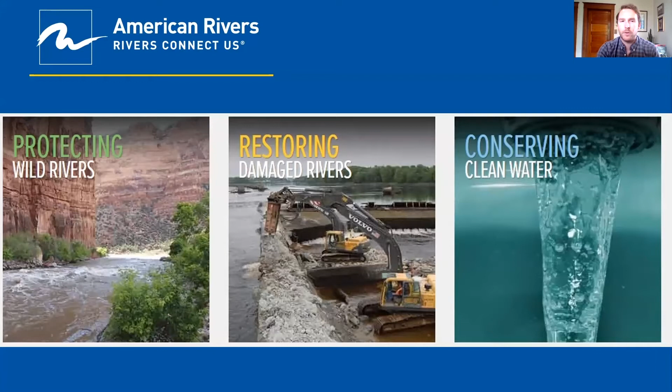At American Rivers, we are concerned with protecting wild rivers, restoring damaged rivers, and conserving clean waters for communities across the country. So when we're looking at a river, we're not just looking at the single thread channel itself—it's much broader than that. We like to take more of a watershed view of river health, and associated with that are the floodplains. These are the broad, flat areas along a river that become inundated during periods of flood, and they provide vital aquatic and community benefits.

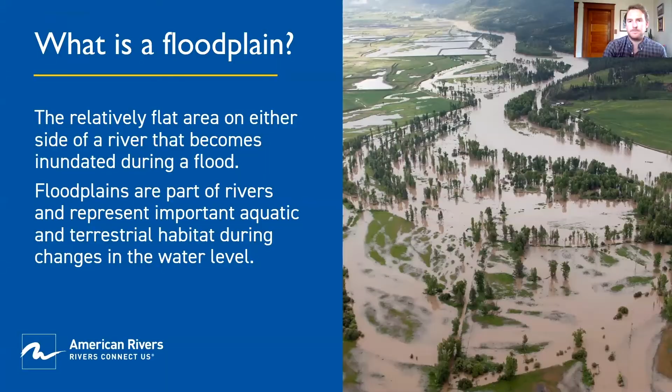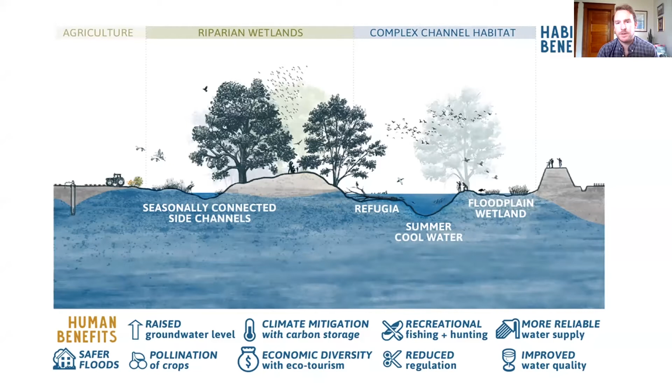A few of those benefits are things like storing floodwaters, which can help protect property adjacent to those floodplains—it stores that water and then re-releases it. That can also help clean the water because it filters through the vegetation and soil. When it floods, it also deposits rich sediments onto the ground that can aid agriculture or other industries, as well as support aquatic and terrestrial life. Floodplains also store groundwater and provide recreational opportunities, specifically when they're not flooded, more of which we'll discuss later on.

The history of floodplains and floodplain development in our country is somewhat consistent. When European settlers came in, the majority of our rivers and floodplains were more natural. As settlement occurred, a lot of the forests around the floodplains and rivers were cleared, and those raw materials were transported downstream and made way for agriculture. As part of that, both our land and our rivers began to be augmented.

To support those new resources coming out, industry came in afterwards and usually settled along rivers or ocean fronts and estuaries, processing those materials and transporting them elsewhere. With industry came jobs, and development began to expand throughout the floodplain. So to support and protect those emerging industries and communities growing up in the floodplain, new flood protection measures came online throughout the 20th century, and now we're left with the situation we have today.

A lot of our rivers have been straightened and leveed to protect the businesses and residences behind them, because our floodplains now provide substantial tax base to these communities. In King County alone, 65,000 jobs are located in the floodplain, supporting about 7% of our overall economy. So these areas are really important, and they were protected over time, and now consist of a variety of uses, including industrial, commercial, and residential developments.

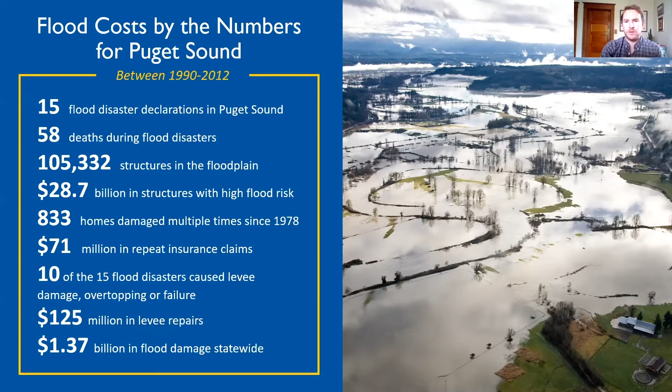Despite having 400 miles of levees throughout our region, flooding remains one of our largest and most costly natural disasters. We've had 15 major disasters since 1990, with over 100,000 structures still in the floodplain, resulting in over $1 billion in damage over the last 30 years. While this is a consistent problem for us, it's not unique to us—these numbers are dwarfed by those in the Mississippi, the Midwest, and the East Coast. This is an issue throughout the country and part of why we're all here today.

In the Northwest, we have endangered species, which adds another layer of complexity. Our Chinook salmon, king salmon, populations have declined by 93%, largely due to habitat loss. The majority of our riparian forests were cleared at the beginning of the 20th century, and only about half of our floodplains remain—and of that half, most are in poor condition. It's no wonder these iconic species are declining.

As a result, so are the predators that rely on them. Southern resident orca whales are also listed as endangered, and Chinook salmon are their primary food source.

So when we're talking about floodplain restoration, what are we actually talking about? In this context, floodplain restoration refers to returning the connectivity between the river channel and the floodplain so that water can access the floodplain at the right time, volume, and frequency to support ecological processes at the appropriate scale. We want that water out on the floodplain at a scale that's conducive to that system. Especially in the urban context, we're also talking about converting land uses that are conducive to or benefited by regular inundation—transforming a unit of risk into a unit of natural capital.

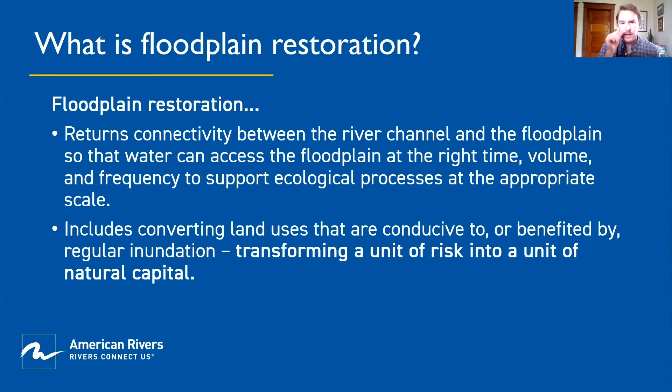This is an example of a floodplain restoration project—a levee removal in Washington. Floodplain restoration can take a variety of forms. It could be reconnecting the floodplain through levee setbacks or levee removals like this, or it could be riparian vegetation or preservation of the floodplain, among other things.

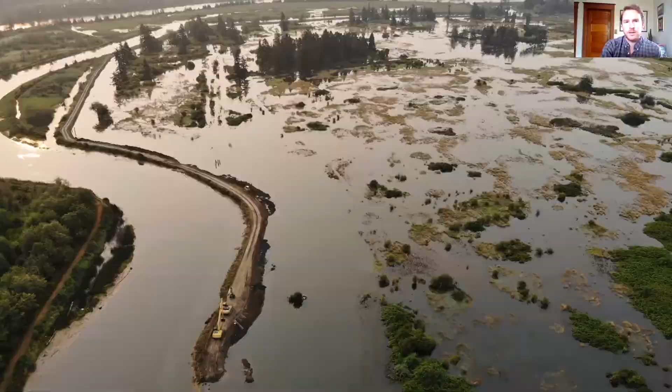And we often hear that we're not going to lose a single business to the river. But that's just not the full story, and that's part of why we're here today, and what some of our findings help support.

Number three, we need to justify and quantify the return we're getting on our restoration programs. There's been billions of dollars invested in restoration, and billions more invested in flood protection. We need to better understand the economic impacts of that investment so we can be more competitive with limited funding moving forward.

Put another way, what we are here to do is understand how restoration impacts revenue. We know that revenue funds restoration, but what we're trying to determine is how restoration impacts revenue, and what are some of the economic benefits associated with that.

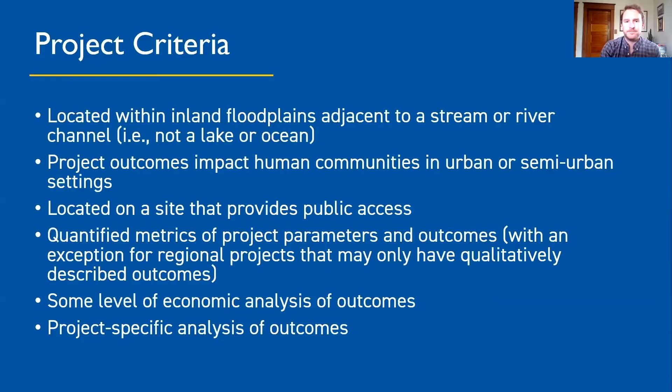Out of the literature, we found a variety of case studies across the country, and a couple more, one in Canada and one in Europe.

What we found was that the economic outcomes from restoration can be split up into six broad categories. Floodplain restoration can reduce flood risk, increase property value, add valuable development outside of the floodplain, increase tax revenue often from that development or from visitation, increase and add new jobs and economic activity, and attract new businesses and employees to the area.

So reduce flood risk. We all know flooding is our most costly natural disaster here in the country, and it's only increasing with climate change. We need to both improve the security of our cities and communities to prevent further loss of life or property damage. But we also need to improve our financial security. We cannot continue to spend billions of dollars every year on flood restoration or disaster recovery, so we have to do better and plan more appropriately.

By doing that, we can actually reduce our flood insurance rates, saving us money, and save money in the long term, because it's been estimated that for every dollar invested in pre-disaster mitigation, six dollars are found in avoided damages. So for every dollar invested, that equals six dollars in avoided damages just by investing early and going through the appropriate planning.

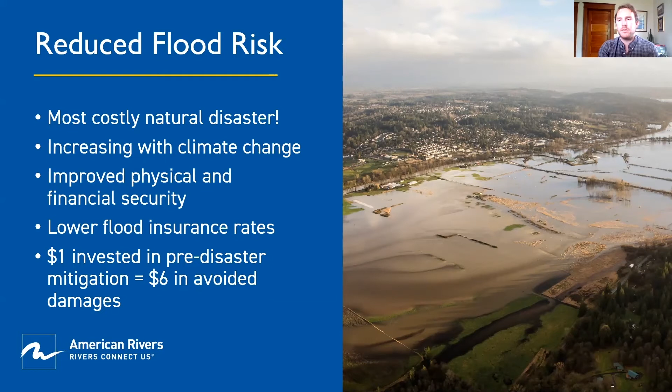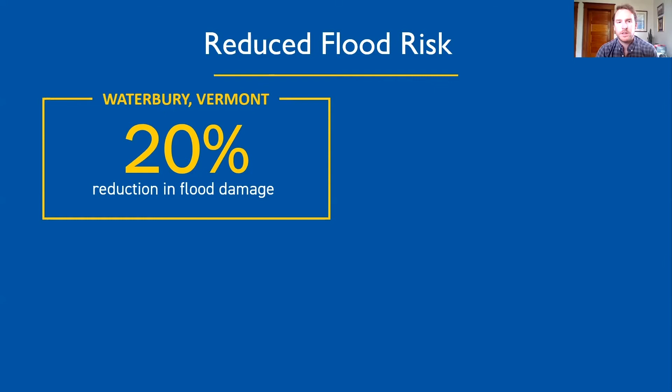Examples we found in the literature: first off, Waterbury, Vermont experienced a 20% reduction in flood damage from their restoration projects. Portland, Oregon did an acquisition and restoration program on Johnson Creek, resulting in $30 million in avoided damages over the next 100 years. In Tucson, $69 million in avoided damages on the Santa Cruz River.

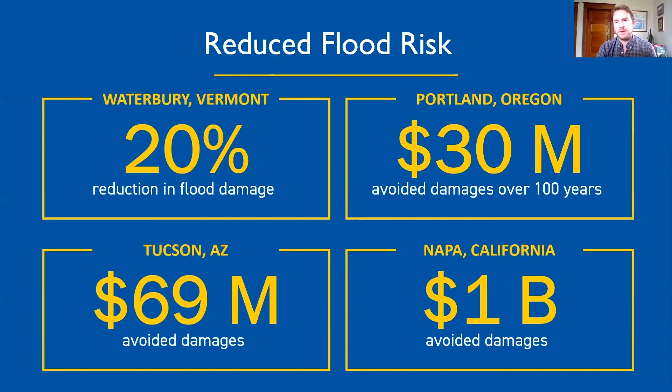In Napa, California, a great project spurred by the Army Corps and the need for flood protection also incorporated incredible restoration and has really transformed that city, resulting in $1 billion in avoided damages and a lot of development outside of the floodplain after that restoration took place.

Increased property value: rivers are often the largest community amenity. Here in Fort Worth, our neighbor Dallas next door is going through an amazing restoration and enhancement project along the Trinity River, restoring and improving it to make this incredible community amenity right in the heart of the city.

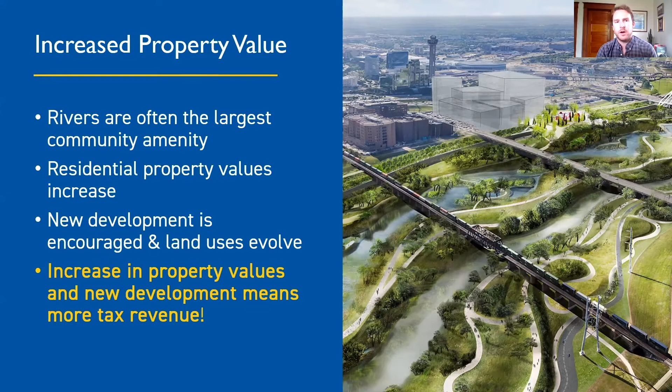With that, property values adjacent to that new development or restoration project are going to go up, and new development is going to be spurred by that project. So a few numbers: $150 million are going to be invested in the Trinity River, resulting in $2.5 billion in new real estate development, and that's going to result in $1.2 billion in new property tax revenue. This is a huge project with also huge economic returns on that investment, and really a transformative project for that city, all based around the river and the new healthy floodplain.

Other examples include Denver, Colorado, which saw a 36% increase when they invested in restoring and improving the South Platte. Santa Cruz, California saw a 3 to 13% increase in property values. Portland saw 10%, and Muskegon saw $12 million in increased value. This can aid existing properties, like who doesn't want their property value to go up, but it can also spur new development and new tax bases that can then be used to support essential services and additional restoration.

So we talked about this a little bit already, but value-add development: you improve an area, new development comes in and benefits from that restoration effort. But it's not just improving that area. It could also be preserving what you have and encouraging new development outside of the floodplain to take advantage or be aided in some way by that existing natural area. Because as we know, it's a lot cheaper to save something and preserve something than it is to rebuild it.

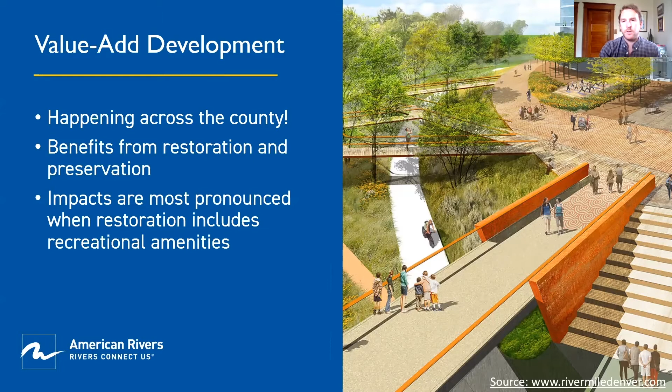So there's an economic value to preserving what you have and restoring what you've lost. And what we observe from the literature is that the impacts of this are most pronounced when you incorporate multiple benefits, when you incorporate flood risk reduction and overlay recreational amenities. A few examples: Denver, Colorado has seen $10 billion in new development after restoring the South Platte. Cleveland, Ohio, $1 billion in new development along the Cuyahoga. Buffalo, $428 million, and Peoria, almost $2 million in new development annually.

And that spurs increased tax revenue, as we already mentioned. Property and sales use tax are the largest sources of revenue for a lot of communities. So when a project takes place, when you embark on this incredible effort, like in the case of Dallas, a $150 million investment, that brings a lot of jobs to your area. There's an initial influx in revenue from that construction spending, purchase of materials, accommodation for those workers, and additional spending that takes place in that area. But that can be a small and temporary boost in the economy when compared to the long-term impacts of developing a sustainable amenity for your community.

So once a river is clean, people want to be there, right? So people will come to that area. There'll be more visitor spending, there'll be more development, there'll be increased recreation or events that provide more tax revenue and more spending in that area, boosting your overall economy. And with that additional revenue, you can create new taxing structures to support your essential services, but also to support continuing restoration.

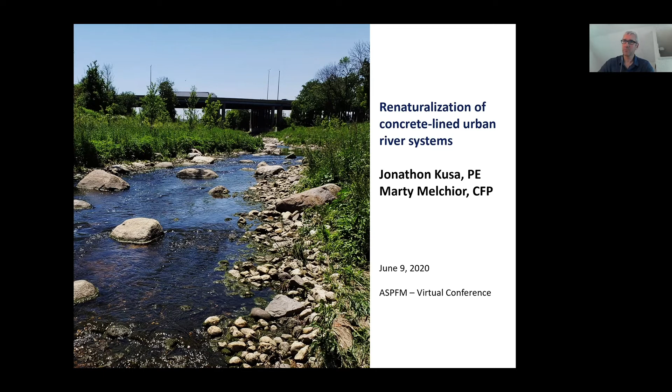Today, I'm here representing Marty Melchior and a broader team of staff that have been working on projects in Milwaukee, specifically looking at the renaturalization of concrete-lined urban river systems. So with that, we'll get going. We're going to start with a quick outline: a brief history of the projects and the project examples we've looked at, talking about site constraints, design considerations, and outlook.

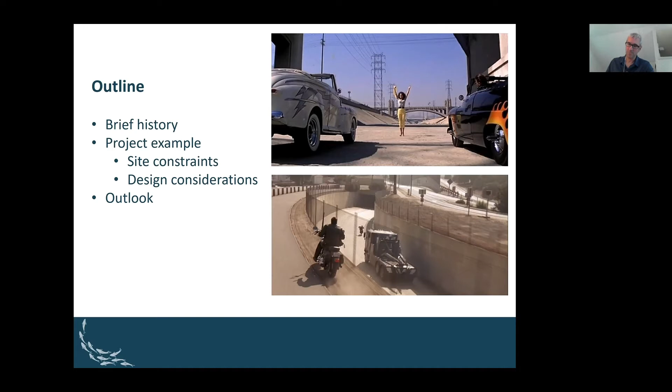So with that, let's talk a little bit about the Kinnickinnic River. Milwaukee Metropolitan Sewerage District is our primary client. Since about 2000, they have spent in excess of $60 million removing concrete channels. The channel we're looking at was formerly a low to moderate gradient meandering river, with channelization beginning in the 1800s as development occurred and continuing through the 1980s. Channels were lined with concrete from about 1965 until about 1985, and so they've started to exceed their design life.

I'm not sure whether it's 20 plus years, but they definitely are in excess of what the anticipated design life was for those channels. And obviously with the concrete, they have very little to no habitat value.

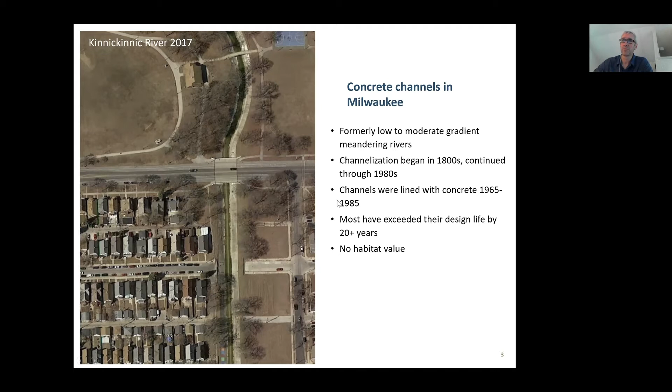MMSD has been looking at projects since 2000. Here's a long list of projects they have implemented, many of which we have been a part of. As an example, we've got Lincoln Creek there in 2000, and then 15 years after reconstruction, you can see it still is functioning as intended, with a lot more ecology and sustainable design integrated into the application.

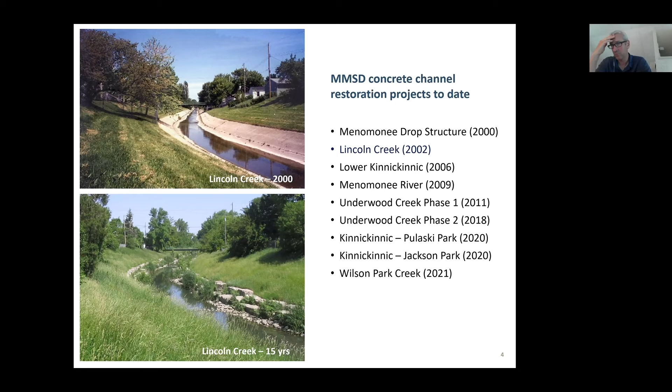So let's look specifically at the Underwood Phase 2 project. Here is the channel as it was prior to construction in 2015.

Project location is essentially within the city of Milwaukee. The Menomonee River is at the top right of your screen flowing towards the lake, and you've got Underwood Creek flowing around the county grounds here, with the CP rails on one side and Fisher Parkway bounding it on the north side. You've got Highway 45 crossing it - a tight urban constraint. Underwood Phase 1 was above the highway, and Underwood Phase 2 was below the highway.

One of the key elements here is that the county grounds flood management project, shown by that dashed green line, was a diversion that reduces the 100-year event by about 50%, or about 3,000 CFS. For an urban design channel, it's helpful to trim off the peak of the hydrograph so you're not dealing with the high shear stress currently being experienced by the channel.

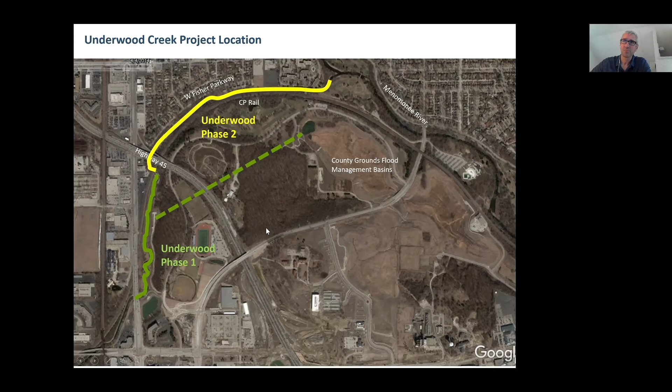This allows us to use a more naturalized material within that channel as we design it. So looking at the channel specifically, one of the things we start with as designers is looking at performance criteria. Those criteria are critical for determining the most appropriate application within the context of that system. These are not cookie cutter projects by any means, so we want to look at each system in its unique form and understand what it needs to accomplish and accommodate relative to the context of the site. Obviously water conveyance is a main issue - getting water from point A to point B.

Then we've got more ecologically focused issues, including northern pike passage to an area upstream of about 140 acres of spawning habitat. You've got wetlands and riparian floodplains, and in-stream habitat complexity. Obviously from the picture here, you can see it's your standard trapezoidal channel with a paved floodplain - not a lot of habitat complexity there.

It is in an urban area, so looking for some natural aesthetics as part of the project is important. And MMSD, like every other partner out there, is looking at how to minimize long-term maintenance, so having some long-term stability that reduces the maintenance needed for this site is a critical element of those performance criteria.

And finally, improving public safety. This system right now - water inherently draws people to it. If you're going to draw people to water in urban spaces, let's make sure that water is accessible and as safe as it possibly can be within the area we have available to work.

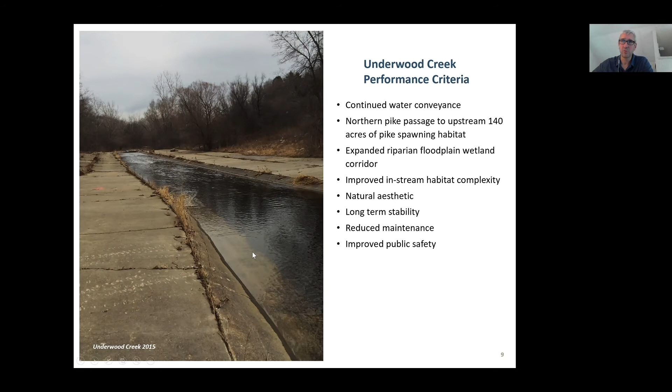So a little bit of history here. The lower portion of Underwood Creek was completely cut off and diverted into a channelized, concrete-lined reach between 1963 and 1967. Between 1967 and 1970, an additional upstream mile of the stream had been channelized and lined. And between 1970 and 1975, the old channel had been filled by the golf course south of the railroad tracks. So you can see it was heavily impacted by urban development over the course of its known life.

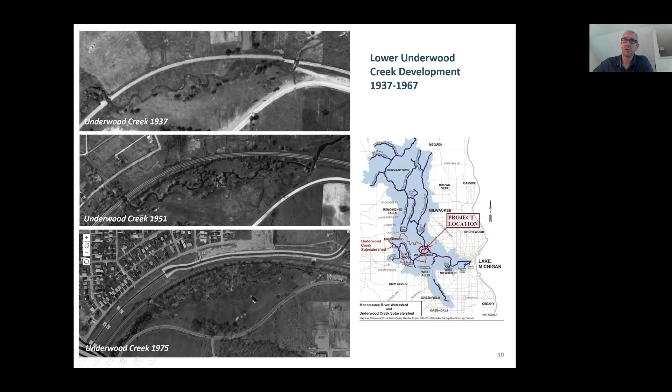In 2011, MMSD began the restoration of Phase 1 and the county grounds, the bypass I mentioned. Then in 2016, we began the design of Phase 2. Corps of Engineers funds under Section 506 of the Water Resources and Development Act supported that work. Then in 2017 and 2018, we began construction of Phase 2. As we note here, the county grounds flood management project created a need for compensatory wetland mitigation, which was satisfied through the Phase 1 and Phase 2 projects.

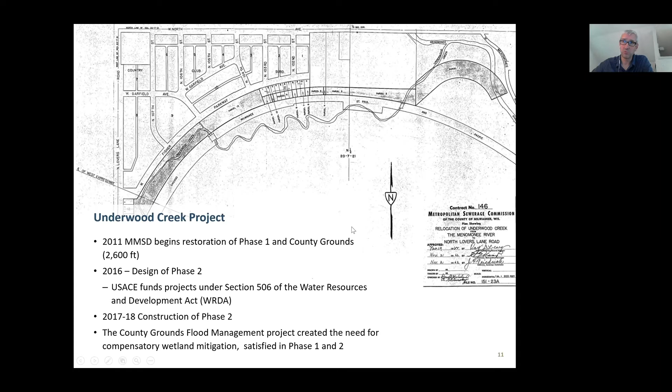So some of the project roles here - it's always important to know who you're working with on these projects. We had a broad team, including MMSD, Army Corps of Engineers, and ESM, who did some planting plan work on these.

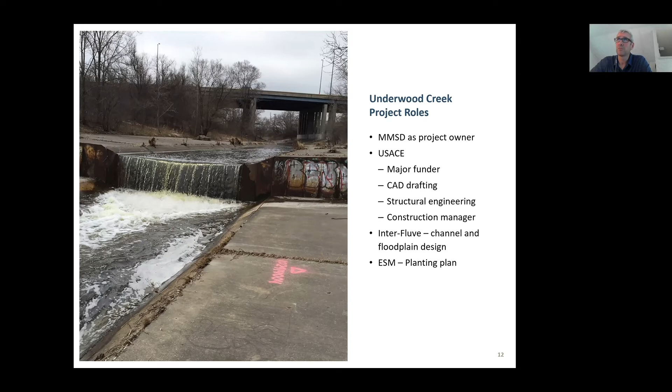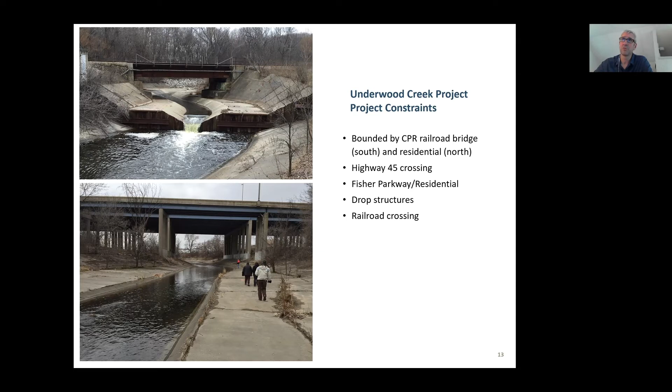The project constraints, as we noted, we've got CP rail bridge to the south as well as the residential streets to the north, and the Highway 45 crossing. We have various drop structures, railroad crossing, and standard urban constraints within the project system.

One of the things we look at as part of our projects at Inter-Fluve is fish passage. The Underwood Creek system has northern pike that migrate through it, and those fish have certain criteria that the water needs to meet to allow them to manage their migration.

So we looked at depth of flow, trying to maintain greater than 6 inches, trying to maintain velocity under 4 feet per second, and providing resting habitat. The velocities do exceed the targets in some of the concrete areas by the railroad, but those areas seem short enough that fish using their burst speeds can get through there.

We also had adult 20+ inch brown trout observed during the 10 CFS condition in October 2018, but those are much stronger swimmers. As is typical for all of our projects, we typically look at the weakest swimmer of the bunch that might be trying to manage the particular channel, and design for that.

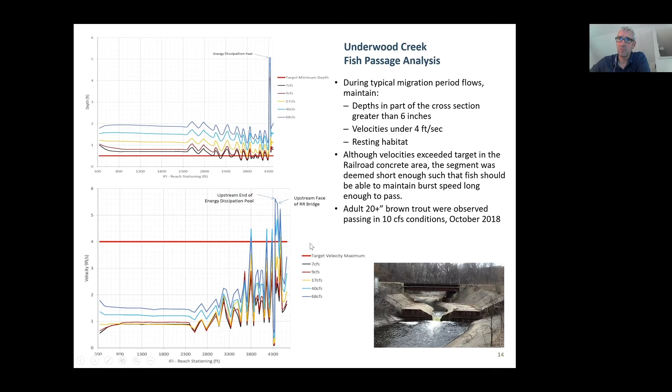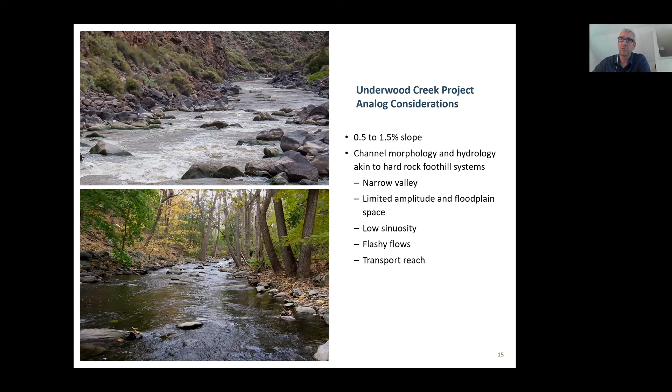So we go out there and take a look, and actually conduct some field measurements. You look at the terrestrial area of the project that's sometimes aquatic, and then the aquatic area that is going to maintain the flows of the system and base flows.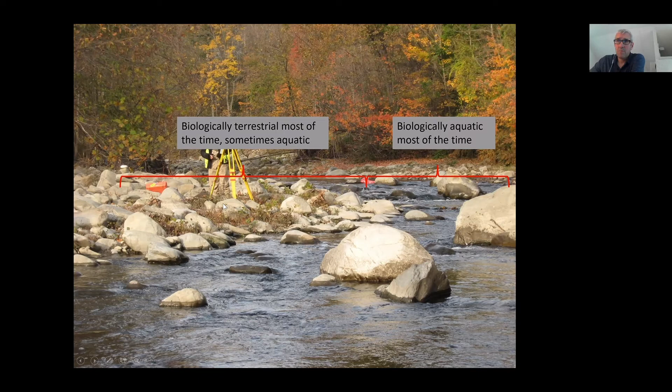You can see the large boulders within that system for creating pocket pools and resting areas, and then the smaller material spread throughout there, as well as material going up on the side slopes that is managing the higher flows as the flows encroach on the floodplain.

Based on that, we develop our project sections. This is what we call an immobile boundary channel. So within urban areas, you don't want your channel boundary, i.e. your edge of your channel, to be mobile, i.e. moving into other areas.

In this case, with the railroad and residential streets and development, you unfortunately cannot accommodate natural stream process here as you would in an open setting with no site constraints. So for this, we had an immobile boundary channel, which means the rock has to be a certain size and certain constraints are placed on the stream to manage the energy of the stream system with materials.

The meander within a limited belt width, in other words, the sinuosity of the stream is limited by the width that we've got available to us within the constraints. You've got constrained wall segments.

There's also floodplain bench wetlands, and we essentially can put in some variable width wetlands that will create floodplain accessible areas. Back to that mitigation I mentioned earlier, it benefits us to achieve those mitigation goals, as well as provide habitat within the riparian corridor.

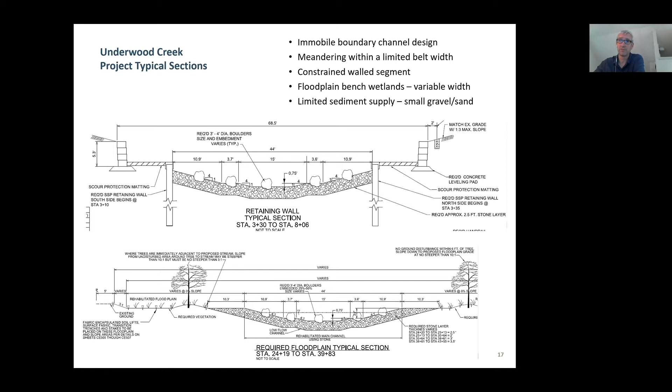And then, as I mentioned, there's limited sediment supply, small gravel and sand, and this is a transport reach, so we're going to move that material right through our system.

The Corps of Engineers based their CAD on our Inter-Fluve sketches. You'll see here that they had some riffle pool segments shown on the channel with anywhere from 1.5 to 0.25% grades. And then there's some tree islands that were placed in the floodplains, as well as maintaining a 2-to-1 to 3-to-1 valley side slope, which is pretty darn steep.

But as you can see here, you've got the West Fisher Parkway and the property line, and then the project on one side, and the CP rail property line on the south side.

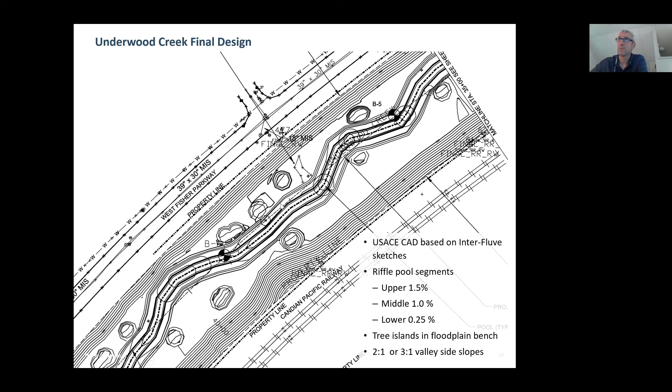A lot of this work is done in the field after we do the initial drawing. So this here is the planting plan with the sedge meadows and the native shrubs and trees. No mow maintenance was the plan, and still is the plan, on the valley side slopes to minimize how much effort has to be put in to maintain the channel.

The design inherently accommodates the long-term vegetation growth of the system in a way that accommodates what is going to happen over the next 50 years, without MMSD having to go in there and actively maintain it.

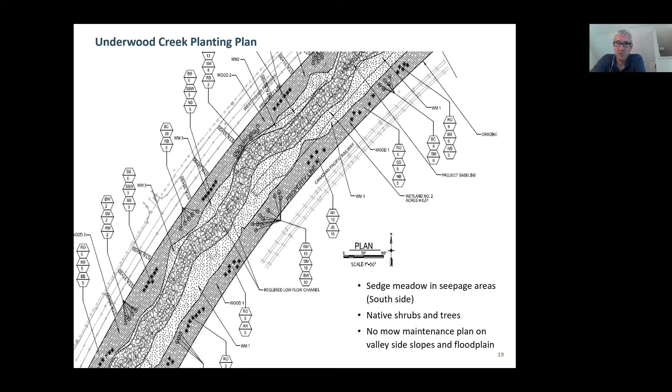Like I say, a lot of these designs require field fit, whether it be boulders for pocket pools or in this case, the vegetation. So we frequently are looking at our design models, the hydraulic model, and assessing how that may or may not be impacted by placement of materials to ensure that we're not creating greater roughness and increasing propensity for the system to flood into adjacent areas by creating unintentional increases in roughness through the project site.

So let's look at a little bit of the project construction photos. These are always fun. We drove in some sheet pile at the base of the Highway 45 bridge. Then the concrete was perforated with that excavator you can see in the photo.

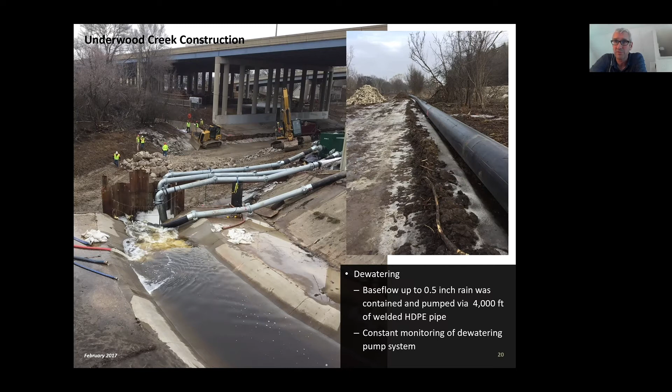The dewatering was done for up to a half inch of rain and was contained via pumping up to about 4,000 linear feet past the channel project site. And then we had constant monitoring of that pumping system.

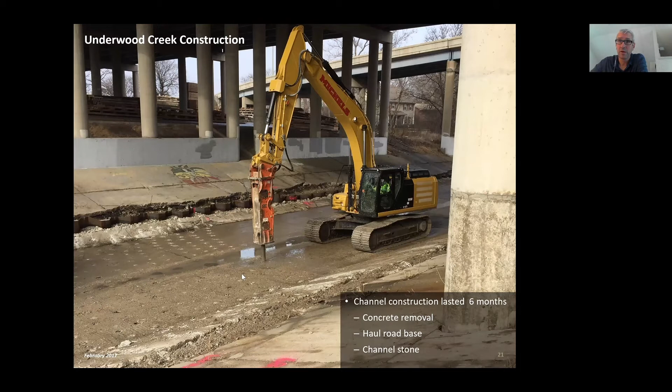Here's the channel construction that I mentioned with the perforations of the channel base. And then we broke that up, and that was used as a base road and hauled away. It was not reused as channel stone.

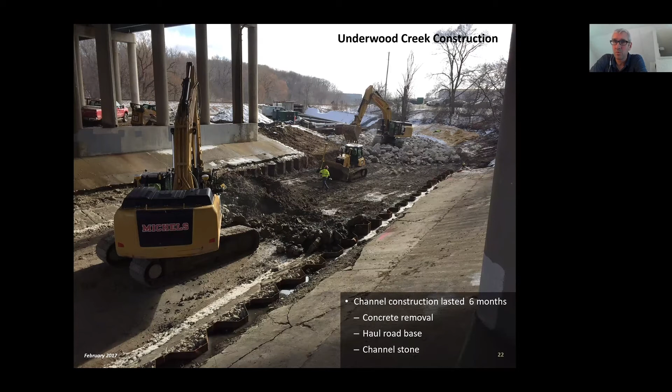Channel construction lasted about 6 months. As I mentioned, we hauled a lot of concrete out of there. Some people consider reusing the concrete to create the channel stone within the system, but our determination and preference is to utilize natural stone where possible. The concrete would functionally work, but from an aesthetic and safety perspective it was not desired.

So as I mentioned, this is an immobile channel boundary. We typically don't like to see the entire channel cased in rock as you see here, but in this case that was the requirement based on the limited space that we had available within the channel.

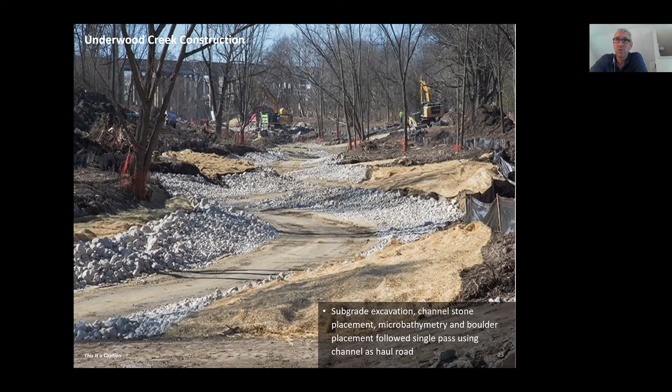So you'll see here the subgrade excavation, channel stone being placed, the microbathymetry and the boulder placement that I mentioned, which was represented in rough form in the plan sets, going to happen here after we do the single pass. So the channel's used as a haul road, and then you're working your way backwards out of the channel as you build it out.

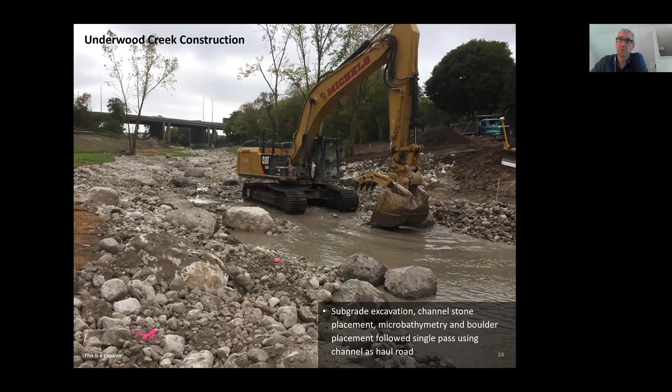So here's the subgrade excavation, the microbathymetry and boulder placement. The excavator here is placing those larger materials within the channel system. You can see the same large boulders that we saw in that natural system. Michels is working on placing those boulders and then digging out the pocket pools as they work their way back out of the channel.

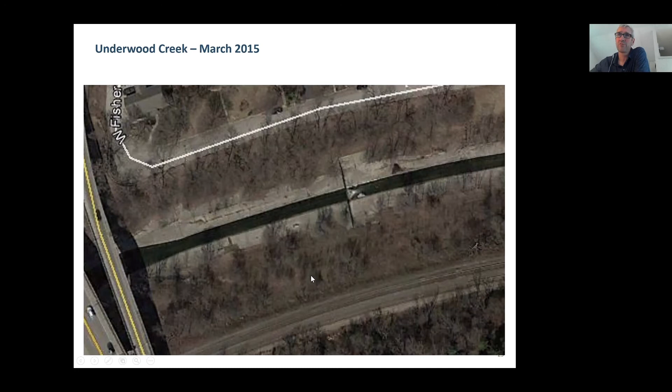Let's see here. You can see the drop structure. This is 2015. The bridge is on your left, and the drop structure is right in front of you. Then here is 2018, that same area with the stream running through the stone channel. The vegetation is just starting to come in, as you can tell. This is one of the first seasons we had growth here.

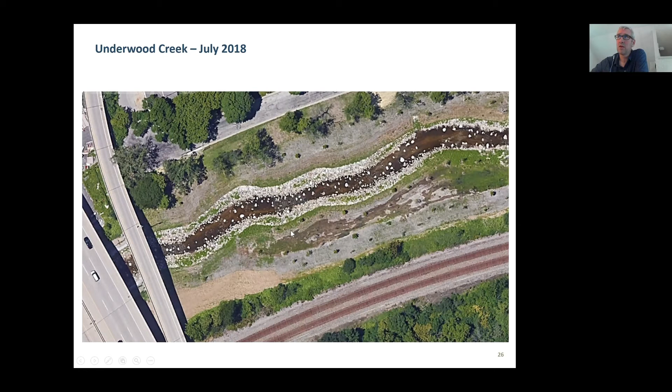You'll see here in 2019 already that we've got a lot denser vegetation. We've got vegetation that's accessible to the channel. So let's say if you're amphibious, a turtle or a frog, your access between the terrestrial and the aquatic is obviously available to you.

You've got habitat space. Water is, for us and most other creatures, a key ingredient for life. So making sure that the natural ecosystem can function to the best of its ability within this urban environment by allowing close connectivity between the terrestrial and the aquatic environment is critical. Key elements that we were concerned about are that this has seen several above bank floods since construction.

The water levels have correlated well with our hydraulic models, which we're happy to see. The channel is moving the small gravel as designed, transporting material through the project reach, and we've seen cyprinids and salmonids migrating through. Most importantly, we've got happy neighbors next to the site because it's working functionally to move and mitigate flood flows, but aesthetically and ecologically it's far enhanced from the concrete lined system that was in place before.

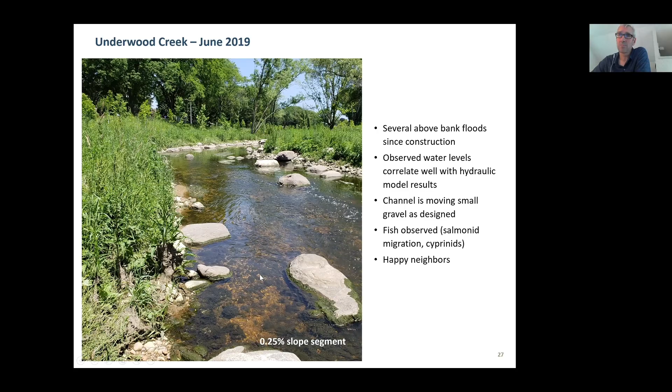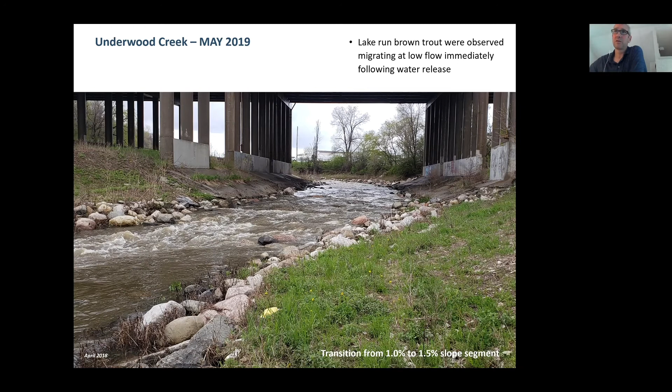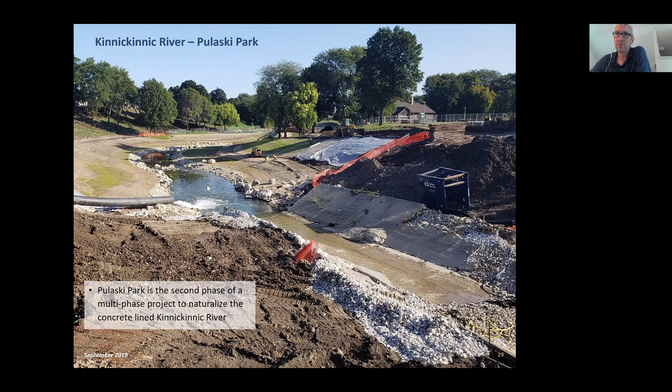Another project area we worked on was Pulaski Park, the second phase of a multi-phase project to naturalize the concrete lined Kinnickinnic River. You can see the concrete line in the foreground discharging into the naturalized system. One thing we looked at here, true for all urban projects, is that you can't always achieve your naturalized system in all locations—we've got urban constraints, including bridge infrastructure, that limit our ability to naturalize all areas.

So this is the area that was designed with retaining walls. Shear stresses are in excess of 15 pounds per square foot through here, and there's just no viable way to maintain a naturalized vegetated system in this location. Recognizing that is important as a designer, so you can understand the appropriate balance between hardscape and more native softscape.

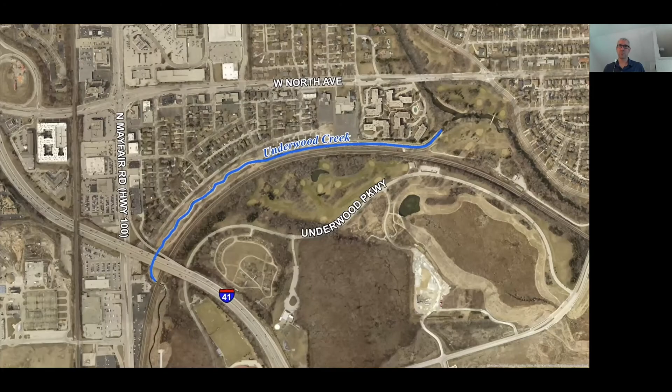With the time remaining, I wanted to show a little fly-through video that I thought might be interesting. This was prepared by MMSD and is a good overview of the project. I'm going to let this run for a minute—it replicates a bit of what we saw, but this is the phase 2 section. As you all know, drone videos now provide a great tool for reviewing project sites, and this was produced by MMSD on behalf of the channel.

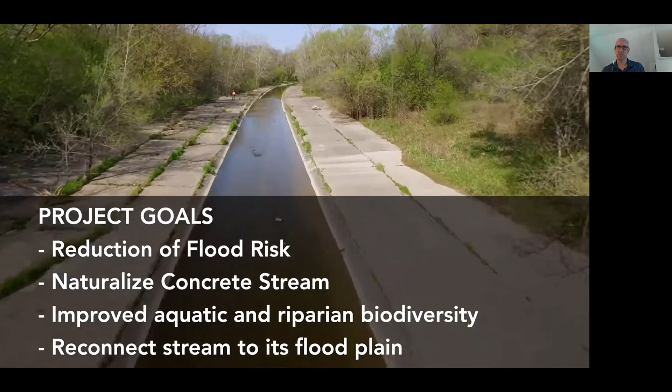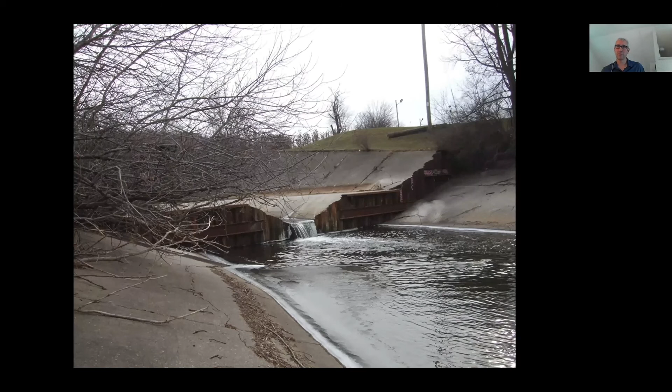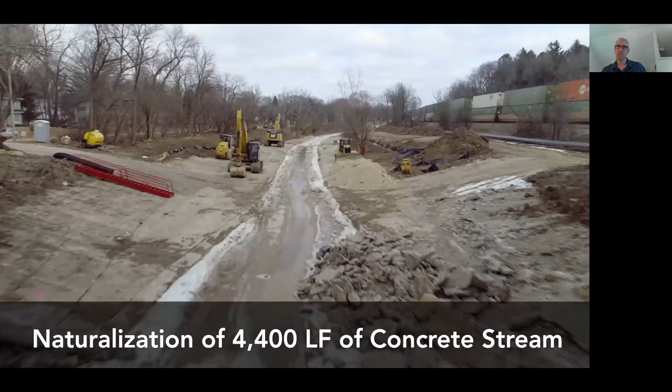You can see a lot of good evidence here—trees actually growing into the concrete, showing the concrete system was at a failing point. Here's the diversion structure with the pumping system, which was pumping that half-inch rainfall around the project site. If it exceeded that, it frankly had to just go right through the project. So we've got about 4,400 linear feet of what we call concrete stream—a term for concrete channel.

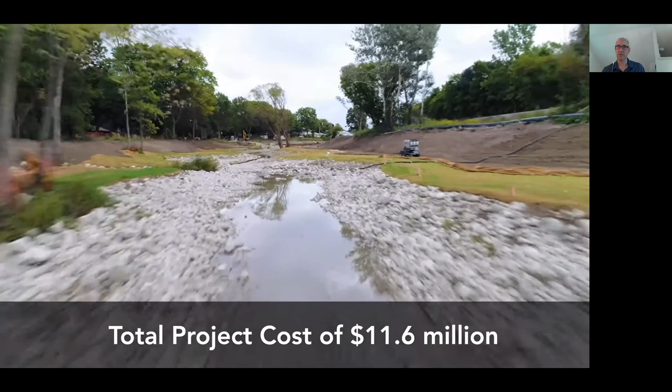During construction here are the low flows, and this is after flow was released into the system. You can see some of the vegetation already coming up through the first summer or year and a half of growth. On the right you can see the fabric encapsulated lifts—we put the soil that is going to be impacted by potential flows into these fabric encapsulated lifts to provide stability, while the green area to the right grows in with vegetation. The intent is to bridge the gap between when there is no vegetation and when it takes hold and provides stability to those naturalized areas.

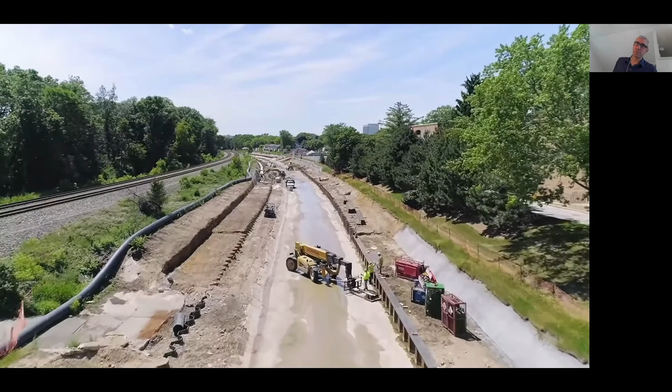So you can see the progression of vegetation through the project site as the project evolved. You can see the project cost at the bottom of the screen—we want to thank our federal partners for always providing support for these types of projects. Here you can see the much tighter constrained corridor, with a parking lot on your right and railroad on your left.

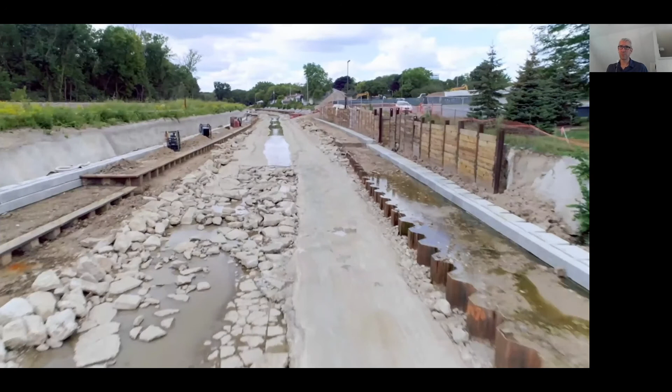We've got sheet pile retaining walls that were used to create that floodplain bench. In essence, trying to concentrate the flows and shear stresses within the channel, within the rock-lined section, and then we can provide a lighter touch in those wetland floodplain benches on those upper areas so that you can get green vegetation adjacent to the stream.

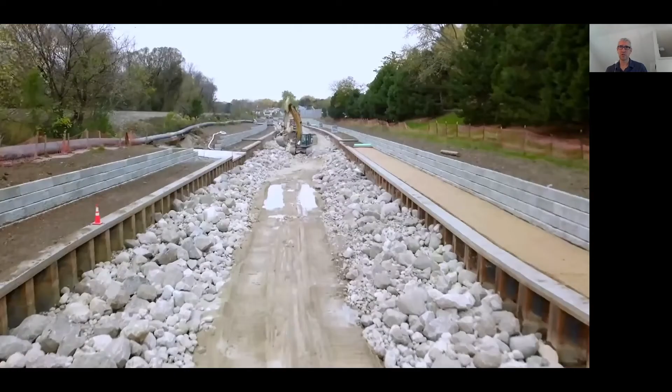Now here, you don't have that riparian connection that I mentioned, which is so important for our amphibious friends and a lot of other creatures. So again, in urban projects, you've got to be realistic about what you can achieve. Obviously, you're not able to allow a turtle access to the stream from that perched riparian bench. So there are ecological limitations that have to be recognized as a natural part of working within an urban environment.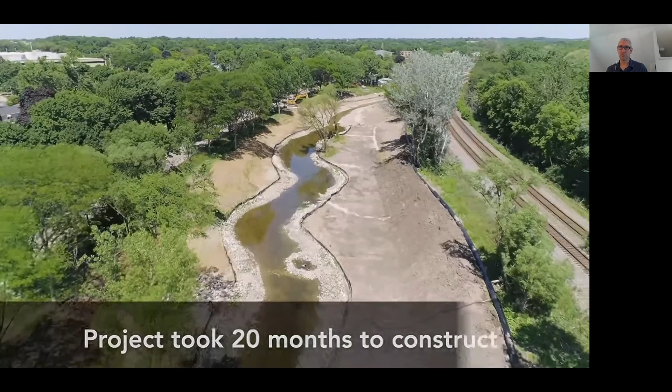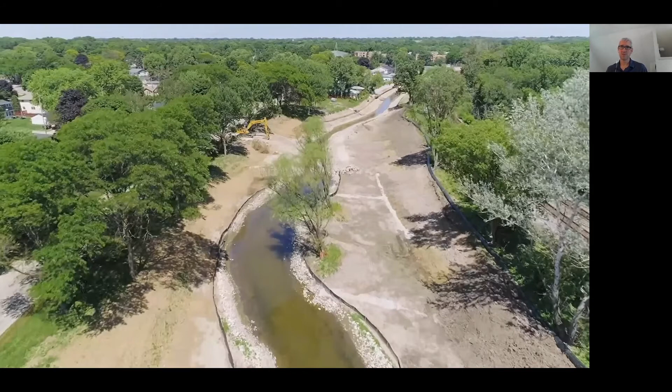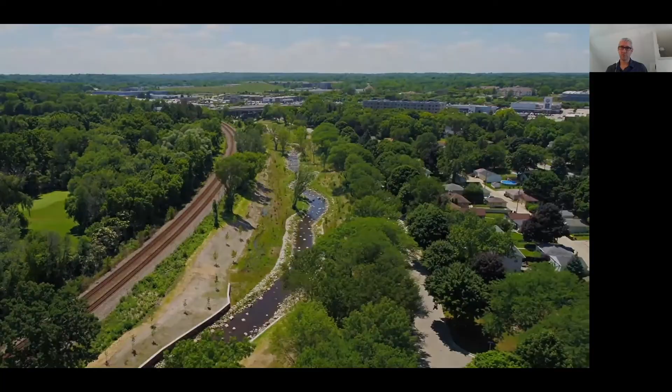But overall, the project did enhance and uplift ecology. You can see here with the flyover that we, even within a tight space, were able to achieve a lot of connectivity between the stream or creek and the adjacent floodplain areas. Whether you're a 10-year-old child looking to play in the stream, or you're looking to walk your dog, or you just want to appreciate the fact that you've got some native ecology and streams in your neighborhood, that's what we are proud to have achieved here with these partners.

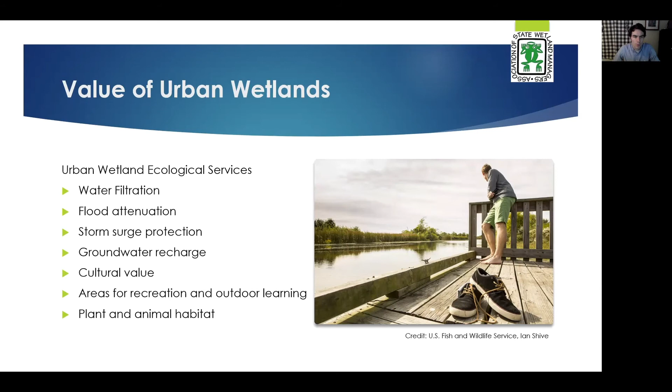So with that in mind, ASWM approached this project, seeing a need that urban wetlands really need some specific attention on what can be done to improve the protection and restoration of these resources.

And in particular, given their proximity to urban communities, the way that it can be done in such a way that maximizes economic, ecological, and social benefits to the communities associated in close proximity to and benefiting from those urban wetlands. We're coming at the project from 3 specific areas.

Broadly speaking, we're calling one of them policy, looking at how state wetland program plans can be better designed to provide support to urban wetlands, and how the EPA's core element framework, which provides an outline for those state wetland program plans, might be improved with recommendations that support the state plans and how those interact with urban wetlands.

The other one is how integrated and functional mapping prioritization tools can play an integral part in urban wetland restoration success or protection, supporting land use decisions and finding the wetlands that are going to have the biggest support for whatever goal you have in mind, and finding examples where that has been utilized or implemented in a positive way.